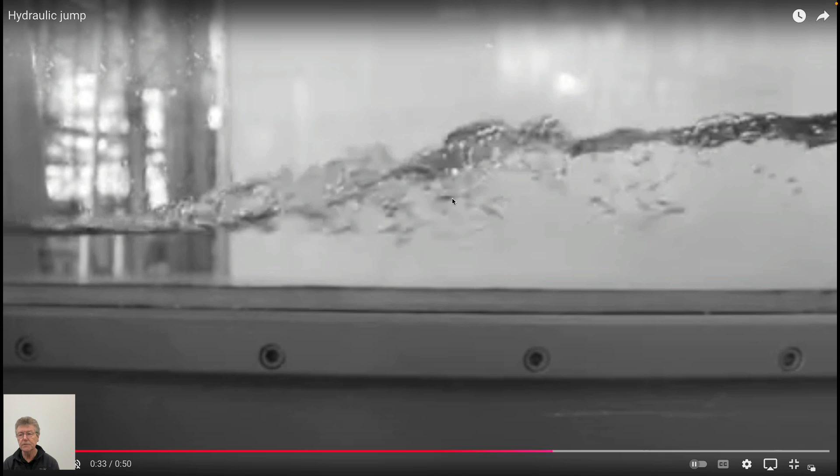And so the upstream flow has to be faster because it's going through a smaller area, and the downstream flow has to be slower. And actually, you've done something like this in one of your examples when we did conservation of mass, and one of you tried to do it using Bernoulli and found out that it didn't work. It doesn't work with Bernoulli because as you go from upstream to downstream, the energy is not conserved in the system, because it violates one of the things in Bernoulli, and that is that you have all these vortices which are really eating up the energy in the system, just like pipe flow and viscous drag on pipes on the inside and on objects on the outside for external flows.

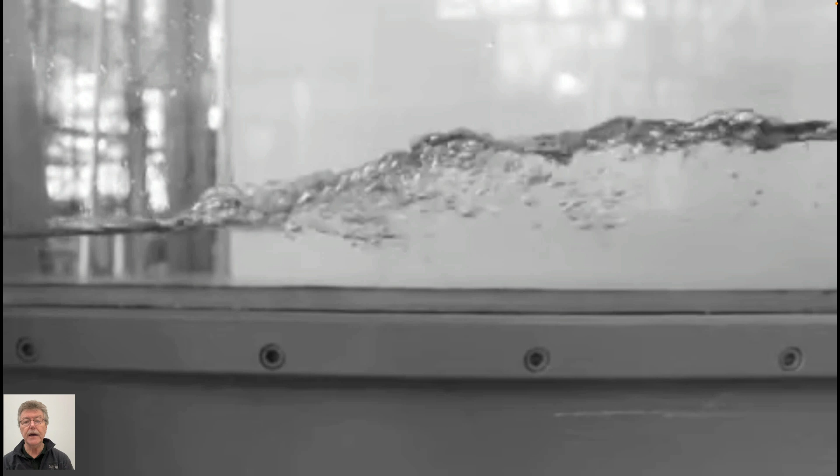The essence of those problems is understanding the losses within this system. And so when we deal with so-called rapidly varying flows, rapidly varying in depth from upstream to downstream, or it could be the other way, going from a deep upstream to a shallow downstream with the same ramifications for the velocity changes, then we have to account for energy losses in the system. So that's kind of the essence of what we might want to talk about here.

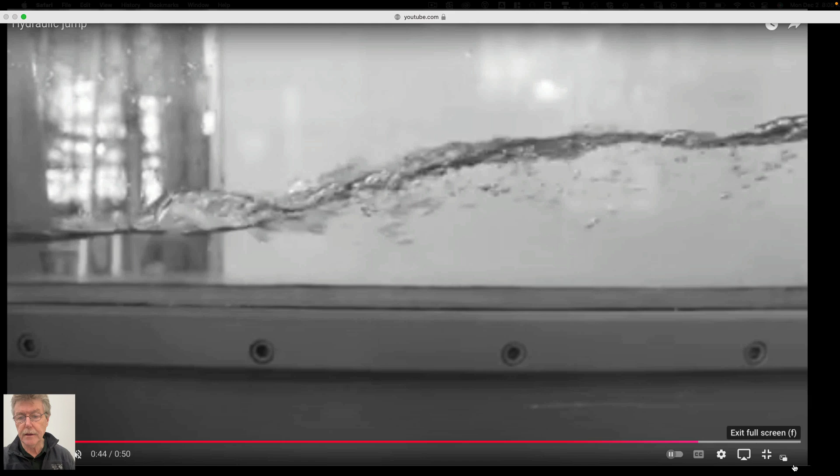I didn't want to do that. I will put that on hold so it doesn't do anything strange for us. So, the essence of these flows are exactly that. Don't know what that is. Don't need to comment.

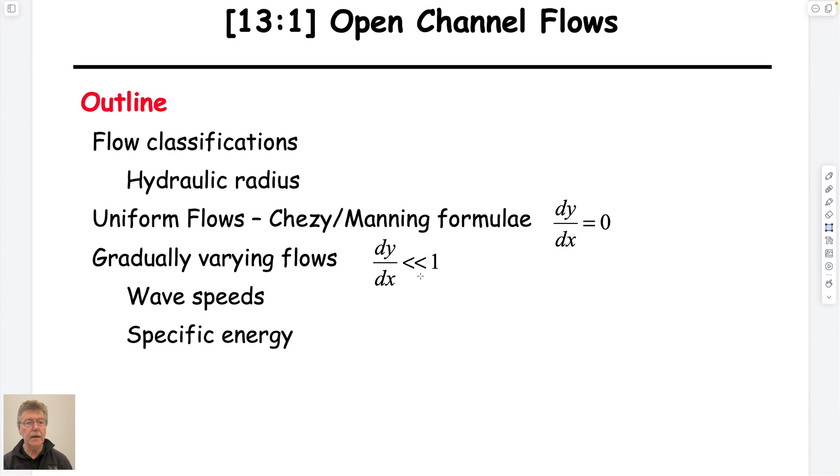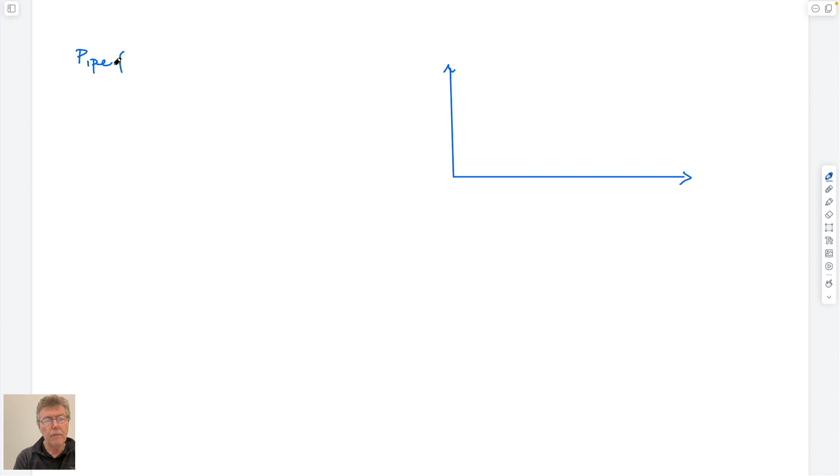So we'll talk about open channel flows. Maybe, although it doesn't have it written on here, it's useful to give a recap before we talk about those, because we've talked about a bunch of individual things. I've showed you these plots before, but let's do it again. Let's talk about the commonalities between pipe flow, external flows, and open channel flows. And so the commonalities are, if I do this, I'm going to draw three diagrams like this.

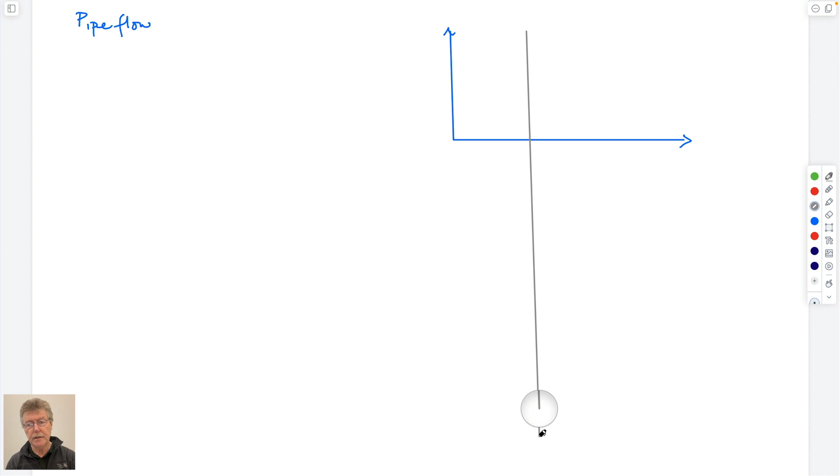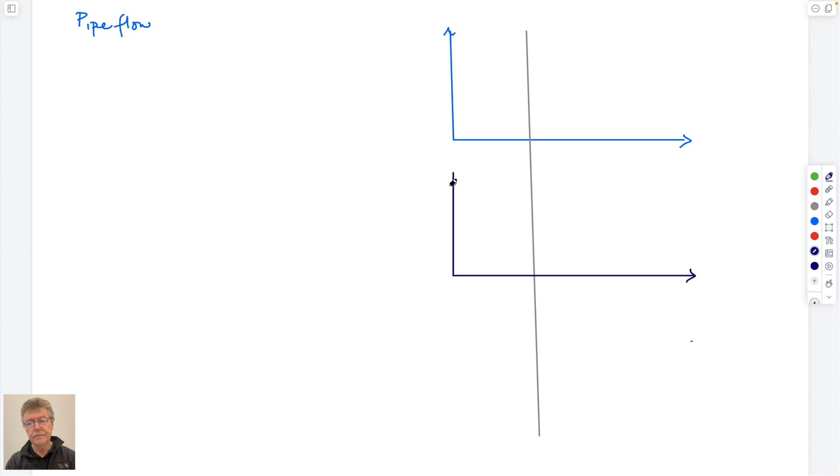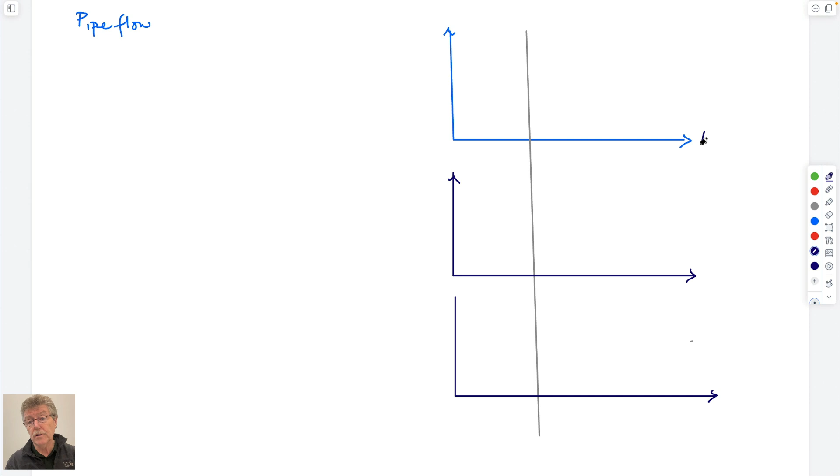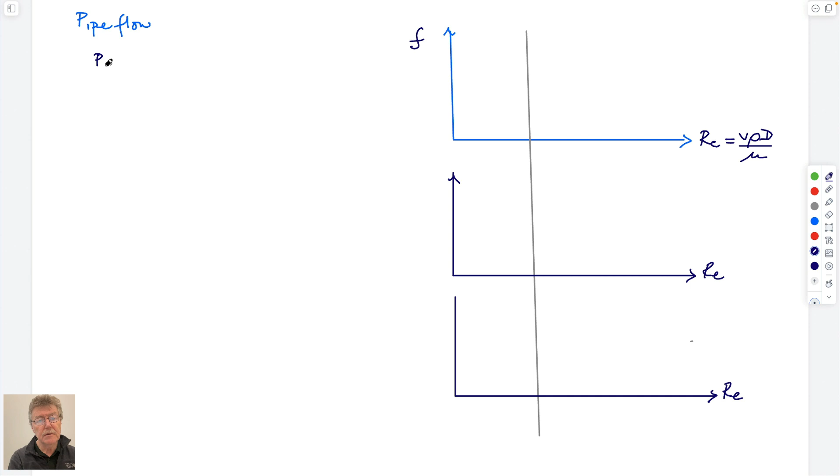And you've seen the segmented plot that I had before in three columns, but for pipe flow. So in all cases, this is Reynolds number, which is equal to a velocity times a density times a characteristic dimension divided by a viscosity. Same in all cases. For pipe flow, we have essentially P1 minus P2. We can do it by writing Bernoulli, or the energy equation, in terms of upstream and downstream. We have this is equal to sum of HL plus sum of HL. So these are major and these are minor. And you know what these are.

Head loss is equal to a friction factor, times length of pipe, over hydraulic diameter of pipe, times V squared over 2g. And minor losses, I guess I shouldn't be doing them so low because I'm moving into this, minor losses are a loss coefficient times V squared over 2g. So they have the same parameters here that they're working on. We end up with this typically because upstream and downstream of a pipe, the diameters are the same, and so the cross-sectional areas are the same, and so V1 equals V2, and so it cancels out in Bernoulli.

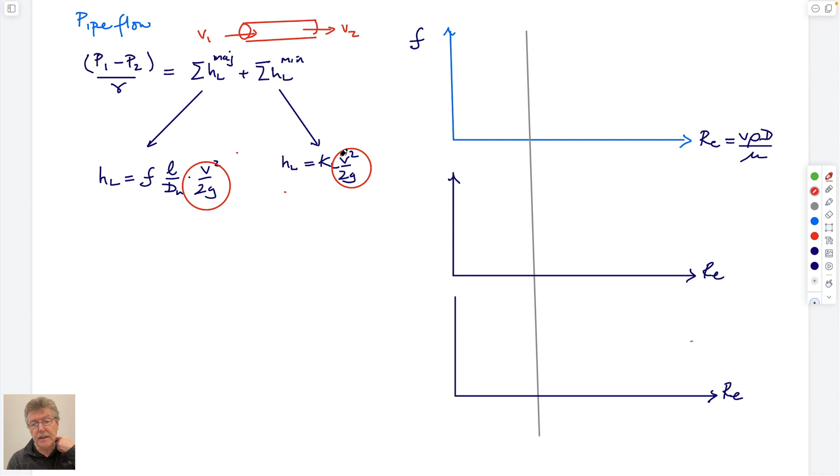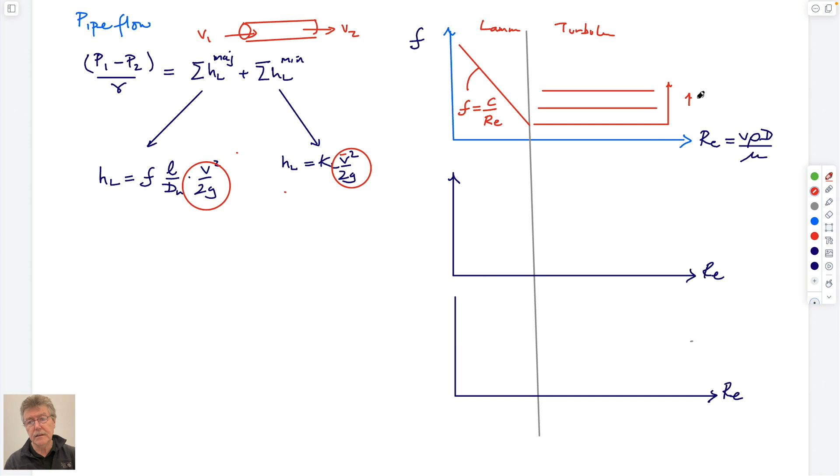But this is the velocity that's actually in the fitting or in the pipe, and we know that these Moody charts look like this. And we understand, hopefully, the characteristics of those charts, and that is that in this part, in all cases, this is laminar, this is turbulent. Friction factor is a function of Reynolds number, or reciprocal Reynolds number, and this is increasing relative roughness. So these are larger numbers and these are small. You'll remember it's a log scale, log scales on both axes. And these are for different values here. And so importantly, friction factor is constant for all of these.

And therefore velocities and losses are due to density. A truck at San Francisco International gets pushed off because you're killing the momentum of the stream that hits against its side. So it's really the density that's causing the push on that. I guess that's really for this one here, but it's the same. We talked about open flows. We're interested in the force that's applied to the body. We don't care about the flow field. Pipe flows, we're interested in the force that's applied to the flow field that slows it down, but it's the same effect.

And this is also, as we know, kind of an Euler number, which is equal to a pressure change over rho V squared. So that's exactly what this friction factor is. And so in this zone here, friction factor is proportional to viscosity. Friction factor, or head loss, is I guess probably head loss, right? It's not really friction.

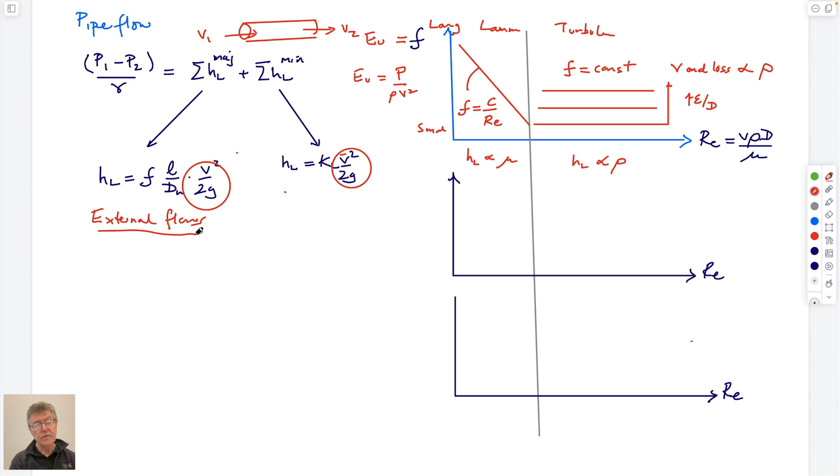When we looked at external flows, we look at drag and weight. Essentially, of course, that's a curly d, not a diameter. And we know that we can define a coefficient of drag or a coefficient of lift as CD equal to curly d divided by a half rho v squared, a I think as well, right? D over a, yeah, must be.

And we made the point that this d over a term is really a pressure, a force divided by a planform area, the area that this sphere sees, which would just be its pi d squared. I don't want to confuse things, but this is d in terms of diameter. And we have exactly the same behavior that we see here. I think probably we have something that looks like this. We get some interesting little behaviors in terms of anomalous responses here. But this also is, what is it? It's also C over Reynolds number. And this is different curves for different shapes. And so the same thing.

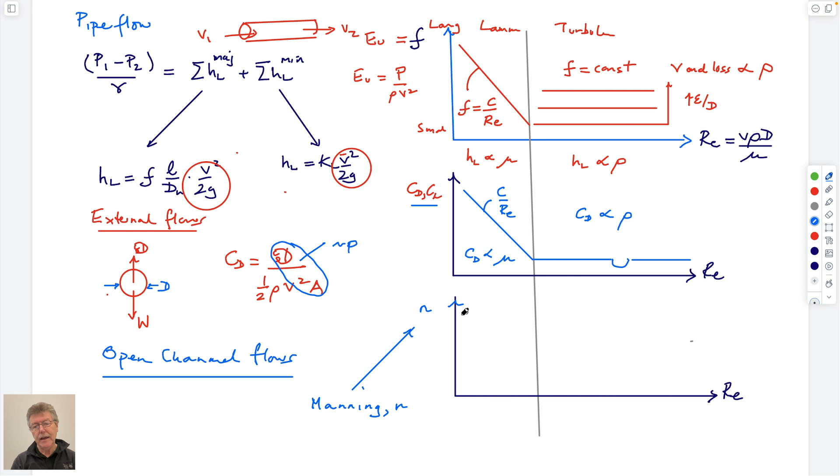And this is kind of increasing relative roughnesses. We won't call it relative roughness, but it's going from a glass lined channel to a concrete lined channel to a soil lined channel. So increasing roughness of the side. And what we'll find out is that for open channel flows, open channel flows are defined in terms of a depth of flow, which we'll call y, and a velocity. And I didn't write the equation down, but we'll see it soon enough, the so-called Manning equation.

So what we'll find out also is that for even modest widths of channels, we're almost always in the turbulent regime. I didn't mention it before, but we assume always for fittings that KL is typically a constant, which de facto means that we're over in this side of the curve, and we're assuming that flow within those fittings is turbulent. If we look at open channel flows, we'll find out that the laminar regime doesn't exist. Almost all flows are turbulent, and so the values of this coefficient change from small numbers, Manning is small, to big numbers as you change the different makeup of the surface.

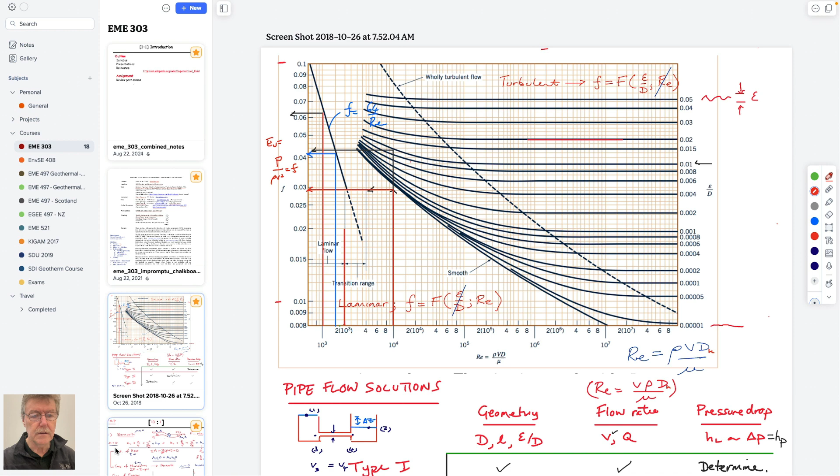So that's what we'll spend a bit of our time doing. And so I'll bring that back up, but the other thing that you've seen that relates to this, I did find it. So you've seen this figure before. It might not have meant anything to you or much to you the first time you saw it, but it should mean something to you now, in that we have these three different geometries.

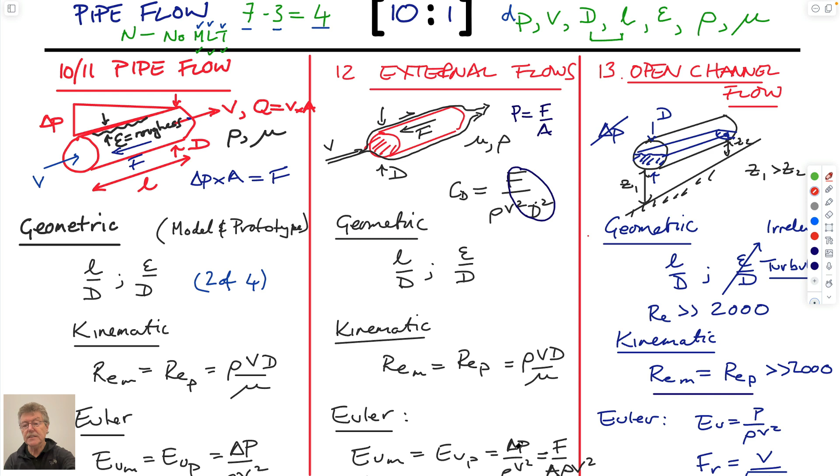If we're doing dimensional analysis, then we have these three requirements of geometric similitude, kinematic similitude, and dynamic similitude. Geometric similitude means that the models have to look the same in some way between prototype and model. Kinematic similitude means that we have to be running at the same Reynolds number between the two models, because that makes our flow regime look the same. And if the Reynolds numbers are the same in the model and the prototype flows, then if the Euler numbers are the same, we can calculate what the pressure is that's making it flow, or the pressure that is applied on our airfoil, or the pressure drop that is applied in our pipe between upstream and downstream. We can get that from the remaining requirement of dynamic similitude.

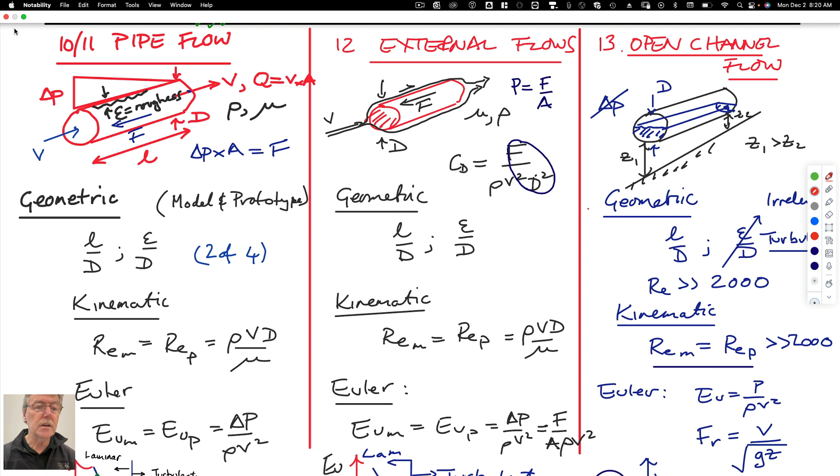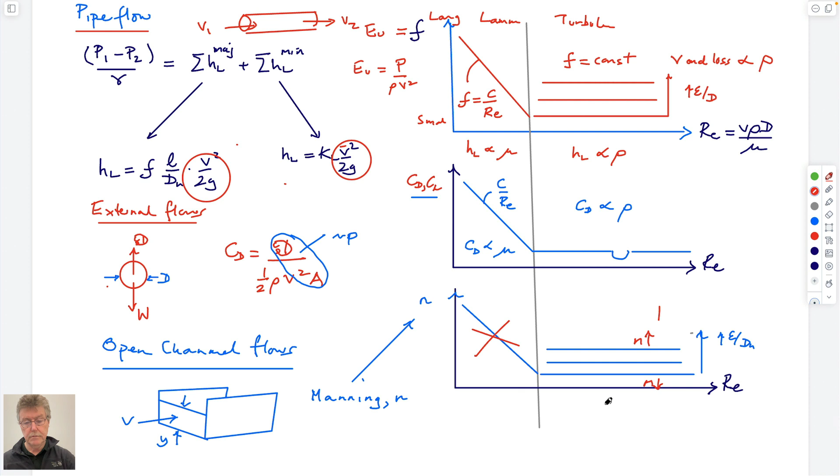So we don't have to derive any equations. We could do a bunch of model studies and get that out of it, but it follows the same path. The same goes for what we're talking about now. These charts, the Moody charts we look at, are just saying that you need to be at the right Reynolds number. And so we make sure that we're sitting at the right Reynolds number through all of these. And if we're at the right Reynolds number, we know what the friction factor is, or we know what the drag coefficient is, or we know what the Manning's number is. And so that's all we're doing to be able to do this.

So what we'd like to do for these, again, too much whiskey, actually Drambuie last night. What we're having,

we'd like to be able to calculate what the velocities and the flow rates are within our system. And so we need to be mindful of two things. One, that we can have flows organized in two ways: fast, shallow flows, or deep, slow flows. And also it allows us to reorganize in terms of the depth of flow. I guess that is the main one. Okay? So that's the recap.

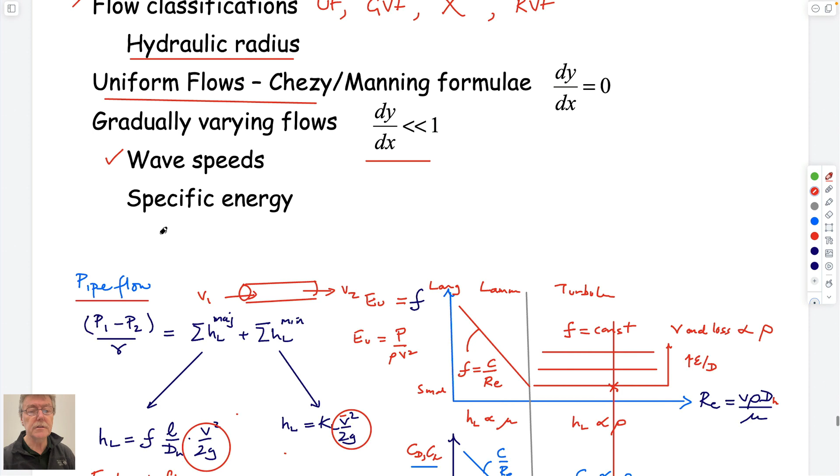And wave speeds have something to say about open channel flows, because of the wave speed of a wave in water, if you have a river flowing downstream, and if you look at the wave speed emanating from dropping a pebble in, that's carrying information away from that impact to the further reaches of the flow. If the flow downstream is flowing faster than the wave speed can travel upstream, there's no way that information can be transferred upstream. And so it defines some different forms of flows.

So I'm going to use my old notes, the former notes for this. So I think the main two issues in pipe flow: one is that you have a free surface.

So that's an extra wild card in terms of the fact that it could be a shallow fast flow or a deep slow flow. But the other thing, I suppose, is that there is no pressure difference between upstream and downstream. If you try, this might be flow within a pipe, but if you have a pressure difference between upstream and downstream, it will just short circuit it by going through the air, and therefore it won't be able to hold much of a pressure difference between upstream because it will be transmitted in the air above the water.

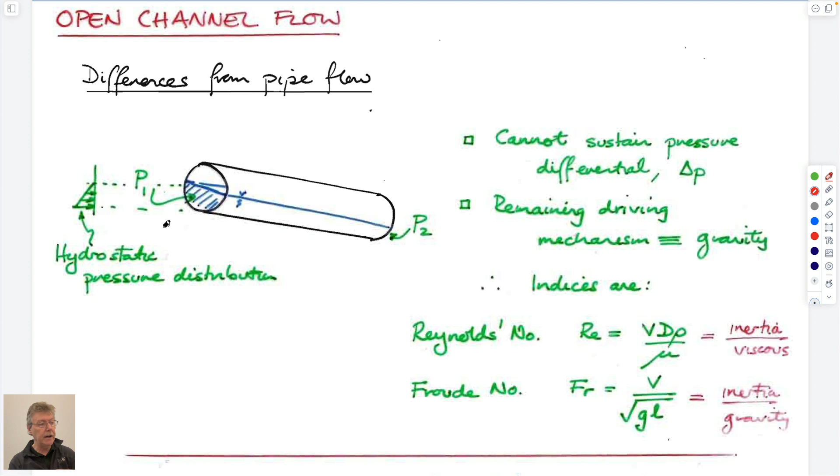And so the pressure difference is only given by the depth change, the change in pressure with depth. And so it's really the only driving force is gravity that's pushing it downstream. Just like rolling a ball down an inclined slope, the only thing that's making it move is gravity.

We can define behavior in terms of two numbers. One you know very well, which is Reynolds number, which we'll talk about. We've alluded to the fact that that's important because of the Moody-like Manning charts, but also Froude number, never quite sure how to pronounce it. And the Froude number is the ratio of inertia to gravitational forces.

And you'll remember that this number on the bottom, gravitational acceleration times the length, if you take the length as the depth of flow, this was actually the wave speed of a surface wave traveling, a tsunami, for example, is given by this. So this is actually the ratio of the velocity of the flow within your pipe or open channel to the wave speed. And it signals as to whether information can be passed upstream, which we'll talk about, which I think is kind of a cool idea. So we've made the point already that we think we're always turbulent.

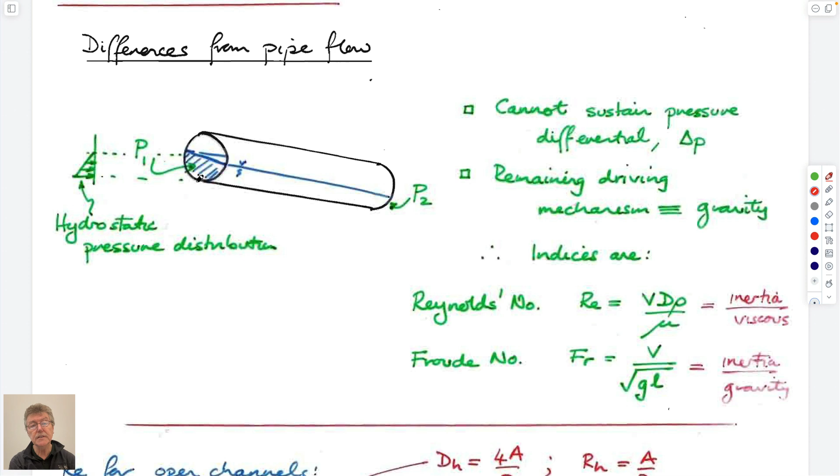In open channel flows, we define something called the hydraulic radius, which by definition is just the cross-sectional area of flow divided by the wetted perimeter. Just as a hydraulic diameter was the cross-sectional area of flow divided by the wetted perimeter. The wetted perimeter was the circumference of the pipe that it's flowing by. But of course, in open channel flows, the wetted perimeter would only be the wetted part of that flow, but the area would be the full area. By definition, this is the definition of hydraulic radius.

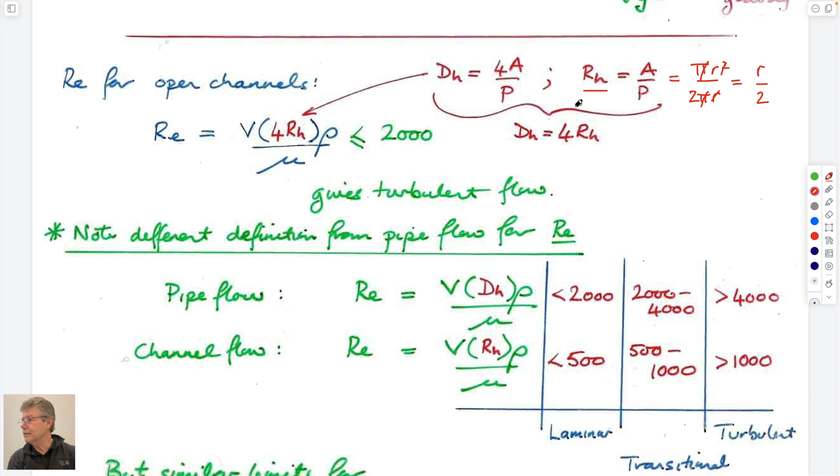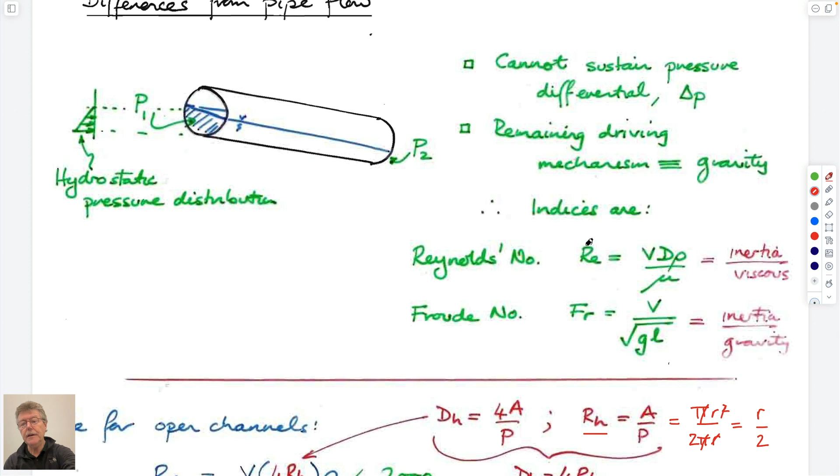I still don't understand why, if you put the terms in for this, the area, if it was fully wetted and circular, this would be pi r squared, and this would be 2 pi r. So this is actually equal to r over 2. You don't get the actual radius out of it if you put these terms in for circular section, right? This pi r squared and 2 pi r would be if this section was absolutely filled. So I imagine you could fill this section, imagine a little air gap at the top. That would still be an open channel flow because it's being driven by gravity. But the hydraulic radius doesn't work out to be the radius of the pipe when you put those in.

The hydraulic radius is actually equal to the hydraulic diameter over 4, just by rearranging this term here. And so if we put in the hydraulic diameter into our Reynolds number equation, which is all I'm doing here, then you end up with 4 times RH. And so different from pipe flows and external flows, the characteristic dimension that we choose is the radius rather than the diameter, hydraulic radius. And so for that reason, since they're a factor of 4 different, then our usual transition from laminar to turbulent happening at about a Reynolds number of 2000, happens at 500.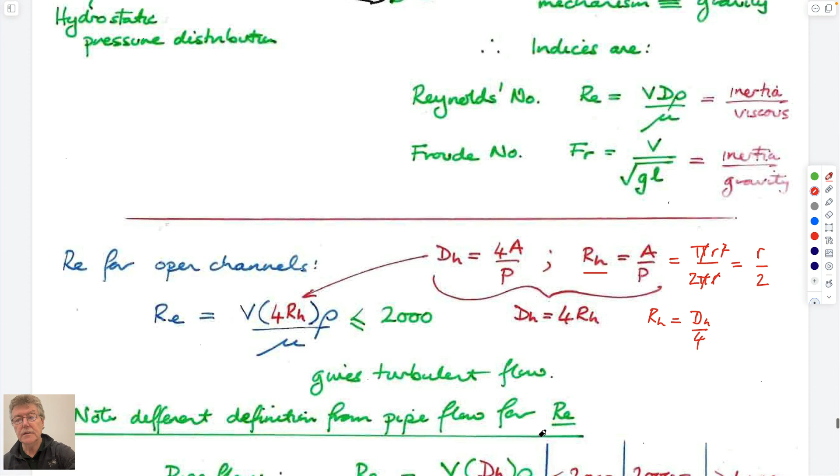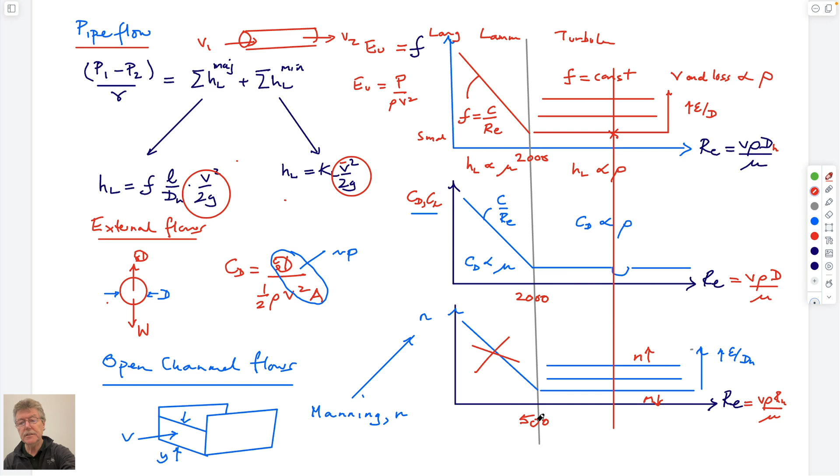And so I guess, I see you writing things down. I'll come back to that, but I'll just put on these figures. So this is, as you recall, 2000. This, as you recall, is 2000. This is 500. And this is velocity times density times hydraulic radius over viscosity. This is velocity, density, diameter, or some characteristic dimension divided by viscosity. So that's an important difference in these. So this breaks at 500. And the reason it breaks at 500 is just by definition that we choose to use a Reynolds number which includes a different length scale. And it's the so-called hydraulic radius. Okay.

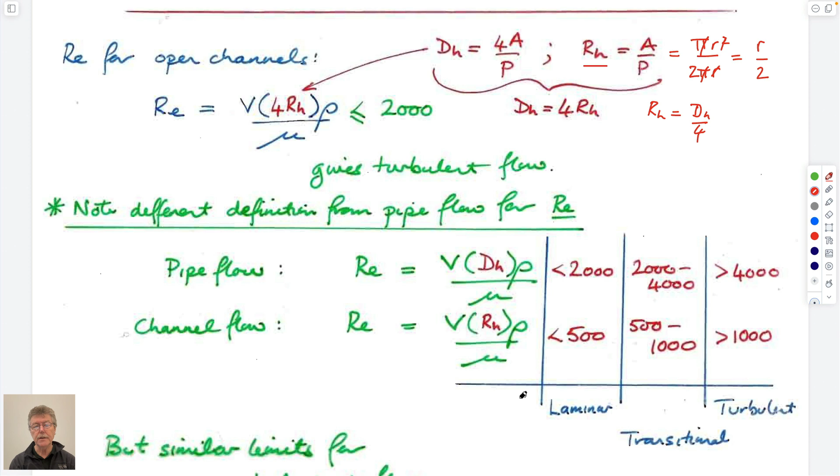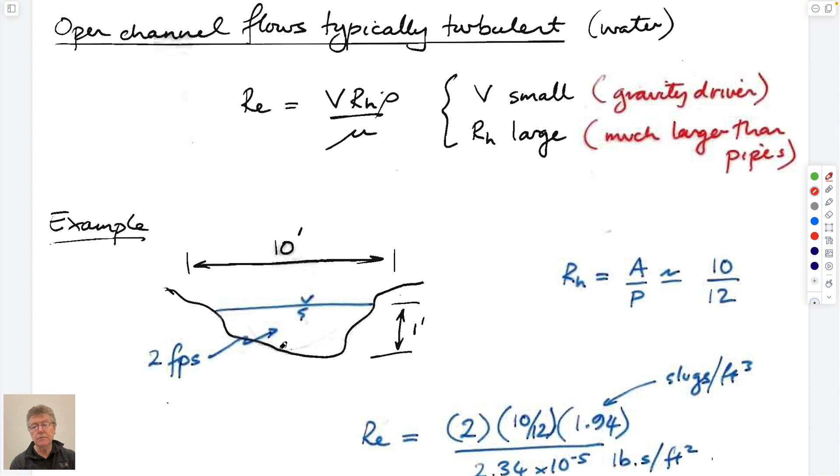I let you take it on trust, but haven't really shown it to you that we're always in the turbulent regime. We could work out what that is just by assuming some parameters for this. If we work out a Reynolds number for a stream 10 feet wide, a foot deep, flowing at 2 feet a second. I know I said we'd never use English units or imperial units, but the Reynolds number, 2 feet a second. The hydraulic radius is the area. The area is 10 square feet, 10 by 1. And the wetted perimeter is 1, 10, 1.

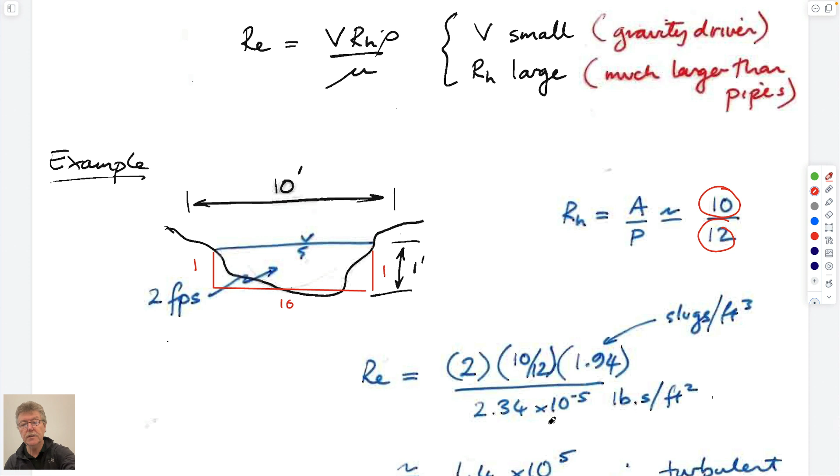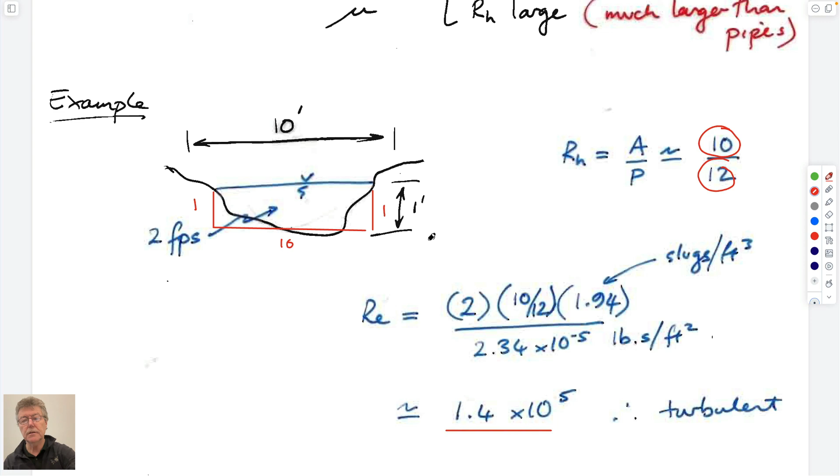So this is 12. And this is density of water. This is viscosity of water in English units. And if you go through that, you end up with a big number, much bigger than 500. So by definition, we're definitely on the right-hand side of our Manning chart, and therefore that's why we will define flows purely in terms of a friction factor, which we call N, which is a Manning coefficient.

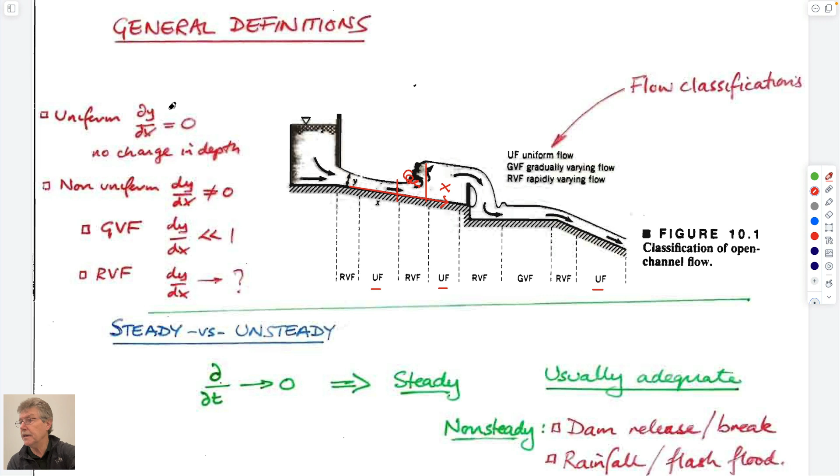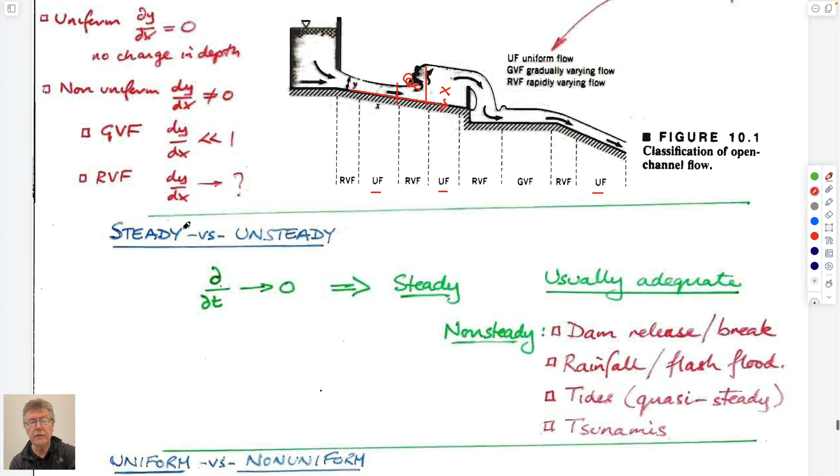Today we'll look at uniform flows, which are the case where upstream depth, so the coordinate system for this is depth is vertical, along flow depth length is x, which is this. And so when upstream depth doesn't change as you go along, you have a so-called uniform flow. Mathematically, it's just given as dy/dx equals 0. And so for gradually varying flows, this gets progressively larger, still not very big, as you'll see here, much less than 1. And here, much bigger values for rapidly varying flows. We'll look at steady state flows only in our system.

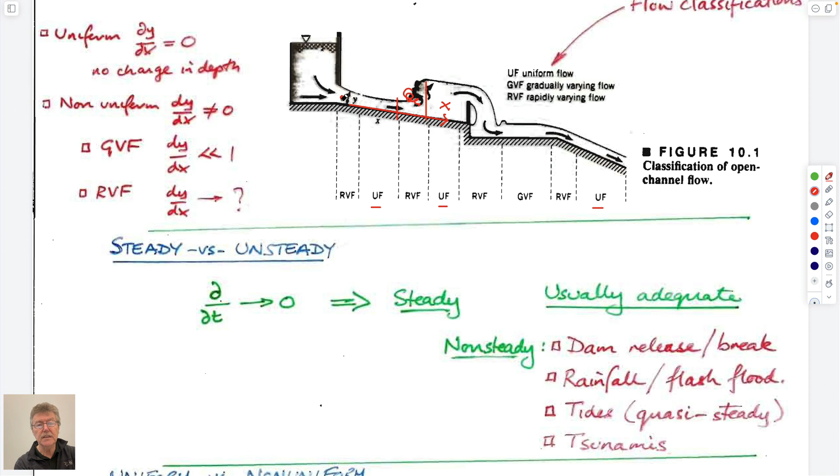So in other words, rate of change, if you take a snapshot, it doesn't change. So that means that if you take a side-on snapshot of this, if you look at this now, or if you look at it in 10 minutes, it's still all of the way along this flow, it looks the same, although obviously the particle of water, or the molecule of water that existed here, is no longer here at the later stage. So we know exactly what steady versus unsteady means. And the difference between these uniform and non-uniform flows are kind of epitomized here. Non-uniform flows is basically the depth of flow upstream and downstream changes.

And we can also define the slopes of other variables in the system as we go downstream. So you'll see here that this is the bed slope, and we can define the bed slope as equal to delta z over x. This is just the slope of the bed, which is obviously, put a ball bearing on a flat slope, it doesn't move. Put it on an inclined slope, the further inclined, the faster it will go. And so you can imagine that flows are the same.

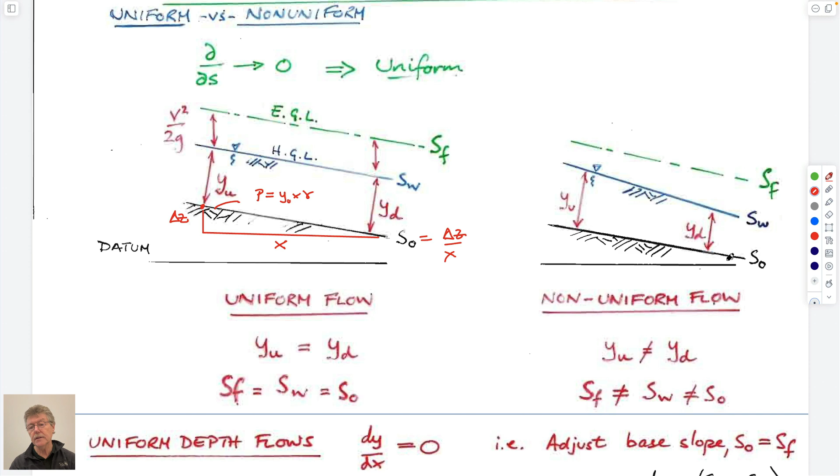Hydraulic grade line would be, this would be the elevation head. This would be the pressure head, kind of, right? So if you wanted to get the pressure at this point here, it would be equal to Y times unit weight. So this is really the pressure head. So elevation head, pressure head, and velocity head. This is measured perpendicular to the bed, but it's so shallow that it's irrelevant as to which it is. And I guess for uniform flows, the point is that the hydraulic grade line and the energy grade line are all the same gradient, and the upstream and downstream flows. And of course, they have to be that because if this depth here is the same as this depth, then the velocities here have to be the same. And so v squared over 2g upstream and downstream also have to be the same as well. Not so when we deal with non-uniform flows, that these individual slopes, the energy grade line, hydraulic grade line, and the bed slope can all be different from each other. But this is the one that we're going to deal with today.

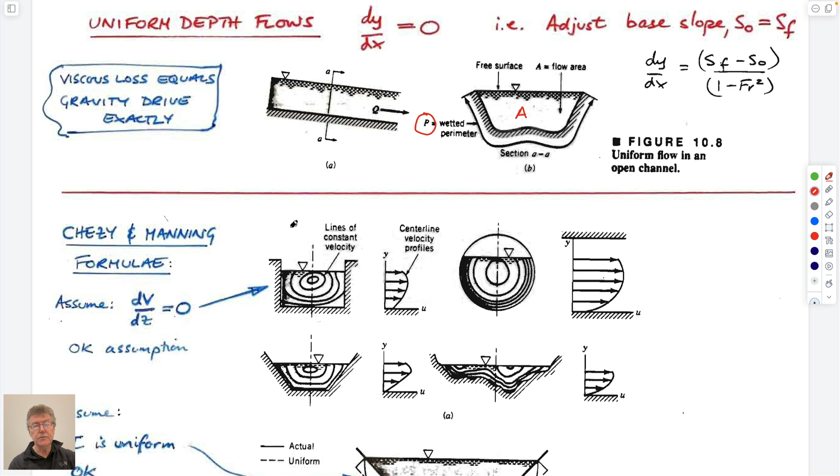So what else do we need to think about? Let's not worry about this figure on this equation on the right. We were interested in the fact that we have flow within it. We know that we have a free surface of flow area, wetted perimeter. So this is the area, and the wetted perimeter is this for a bed. Side-on view, upstream and downstream. I guess the reality is that in these systems, if you want to go fast in a river, go down the middle of the river. Don't go at the bank where it's dragging against the side. Just like in pipe flow, if the section was fully filled, we had zero velocity at the boundary of the pipe, and we have a maximum velocity in the center of the pipe. In open channel flows, you'd expect to have the zero velocity at the perimeter all the way around, and the maximum velocity where it's unconstrained in the middle.

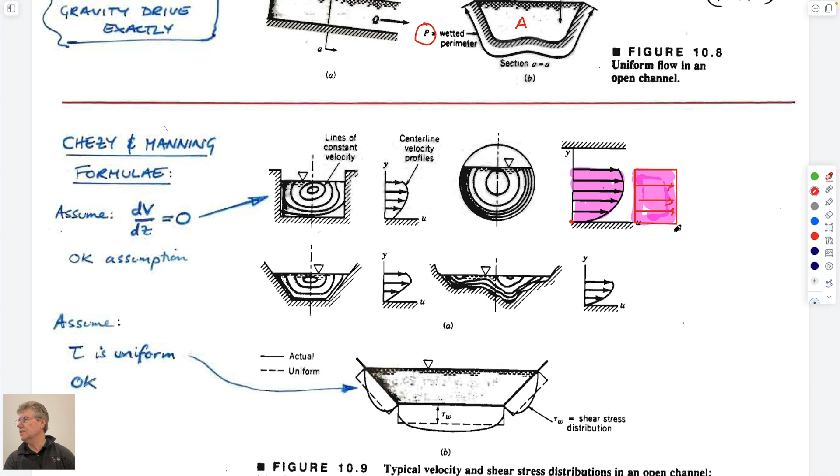Like in pipe flow, we assume for these calculations that the flow is of uniform velocity across the section. And so the area of this red trapezoid or prism, let me use my special marker. This area here would be exactly the same area as here, just like we did for pipe flow. And so that's our assumption.

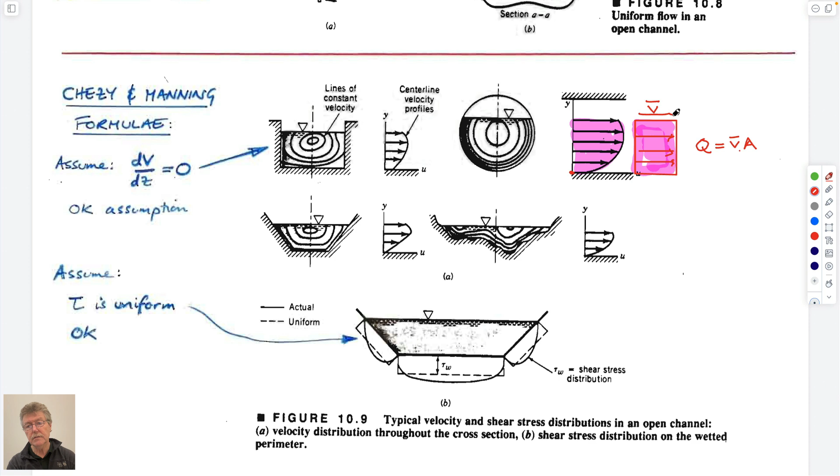So we don't really care that there are changing velocities in the flow field, because really what we want to calculate is that a volumetric flow rate is equal to a velocity times a cross-sectional area, typically, right? And so to do that, we need an average velocity, and this, of course, would be the average velocity across the section here. And we know that there are shear forces added at the sides, and they're probably not uniform, but we perhaps don't worry about that too much either.

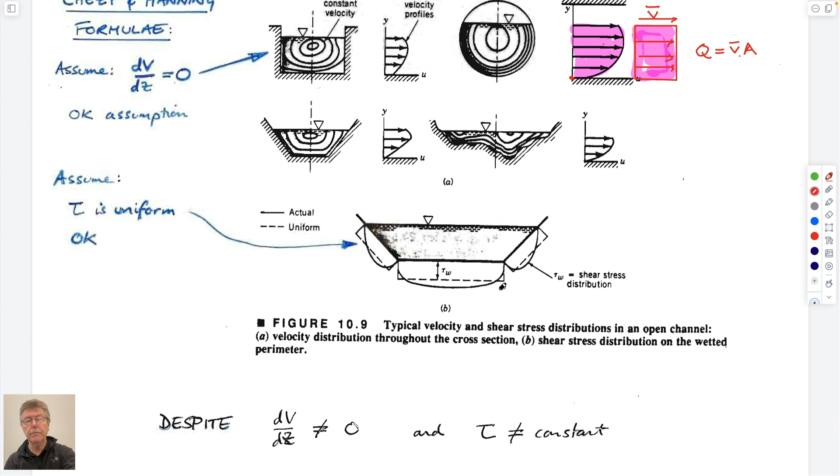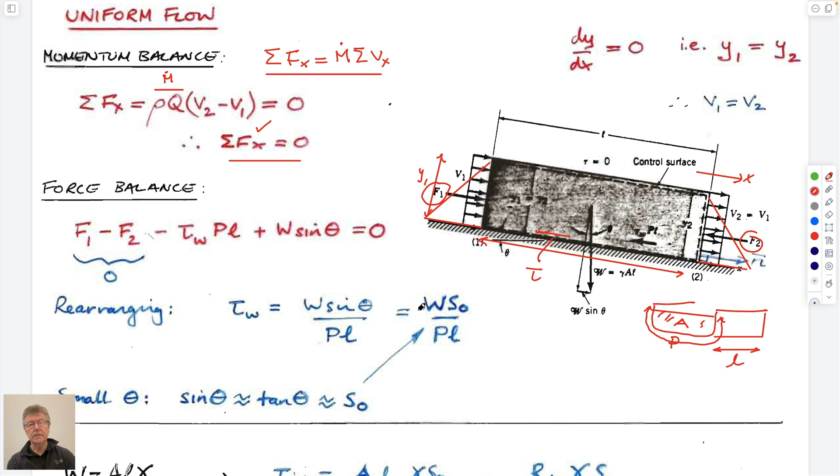So the only thing that matters out of this is the final equation that we get out of it, by the way. So this is the shear stress times the perimeter times a length. So this is an area that the shear stress is applied on. Sorry, probably don't want to do an uppercase A. The area would be the area of this channel, right? If I did it this way, it would be this area here and on this side here and on the bottom as well.

And the only force that's pushing it down is the component of the weight. So the weight is equal to unit weight times the cross-sectional area times the length. So the cross-sectional area times the length is the volume times the unit weight, if you can see this here. So this is equal to area times the length times the unit weight.

And the component of it acting downstream, if the bed is angled at theta, then this angle in here is theta, and so the component that's acting downstream in the same direction as the forces acting upstream and downstream is W sine theta. So this is just a free body diagram. Cut the stream upstream and downstream, leave it there, look at all the forces that are acting.

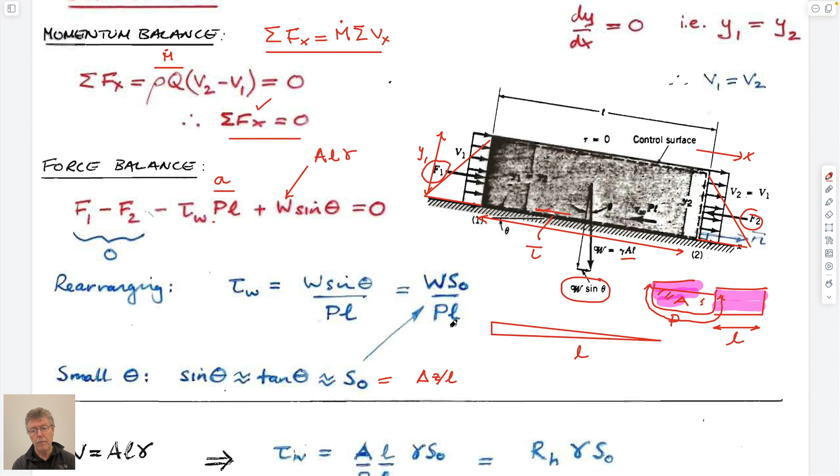We can substitute the fact that sine theta and tan of theta for small angles is equal to delta, what do we call it? I called it delta z before, over L. The height drop, so as you go downstream, this would be delta z. We must be running out of time, I think. Yeah, not quite. And so we can make these substitutions.

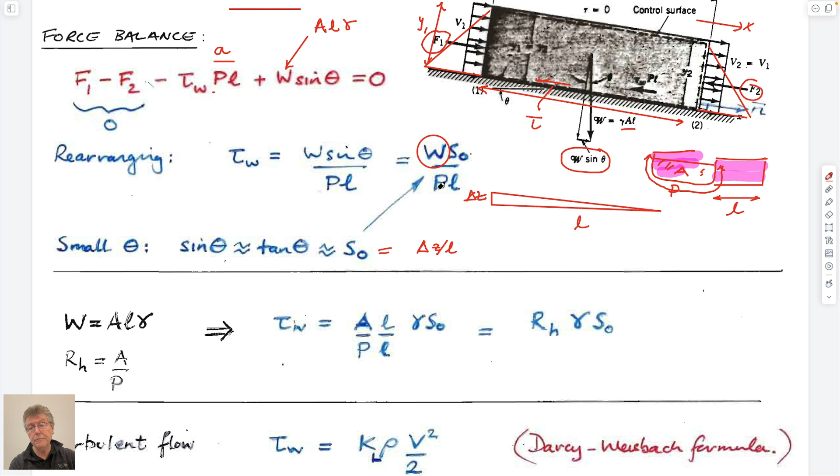We have a value for W, which we know. We have the gradient of the bed, we have a wetted perimeter, and we have a length over which it occurs. And so we can rearrange this in terms of the definition of hydraulic radius, which is merely by rewriting this as, this term here is this. This is this. Yeah, so it's the same equation.

And so by realizing that the area divided by the perimeter is by definition the hydraulic radius, we can substitute this. So this is the end result of this. Driving the flow, unit weight, and the hydraulic radius. So this is a balance between the shear resistance resisting the flow and gravity that's driving it through this unit weight and this slope.

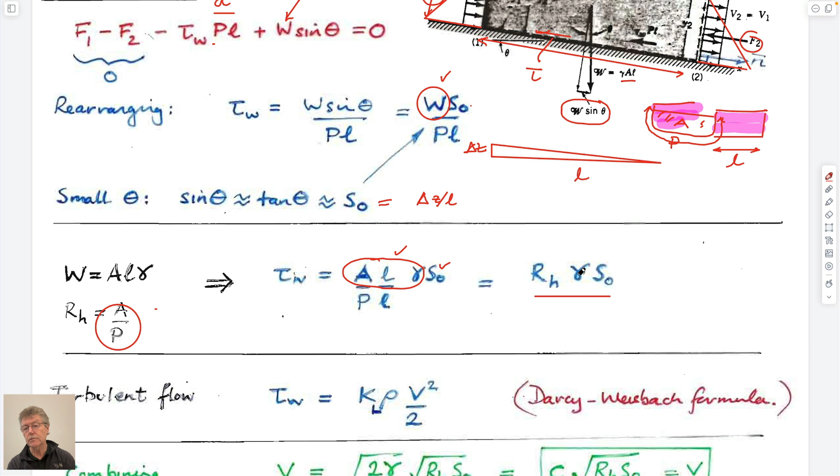I'm not sure we talked very much about the Darcy-Weisbach equation, but you can see that this is basically the loss factor for fittings, right? KL times V squared over 2g is the head loss in a fitting. And so this is kind of what this is. If we equate these two to each other, this is just saying that there's some coefficient that defines exactly how big this shear force will be that's resisting flow within the fittings, or in this case within the open channel. Then if we can define KL, then we can say how much drag is applied to the flow for a given gradient of the bed.

And so if we equate these two equations and go through manipulating them, we have a V squared term in here. So if we rearrange the equations in terms of V squared, so we equate these two equations, actually it's this equation here. So we have hydraulic radius, unit weight, slope of the bed is equal to this term. If we rearrange it in terms of V squared, we get a bit of a complicated equation. If we realize that this term includes our loss coefficient, which is going to be a number, depending on whether we have a glass-lined tube or a soil-lined tube or a glass-lined or a soil-lined ditch, then we can take this outside.

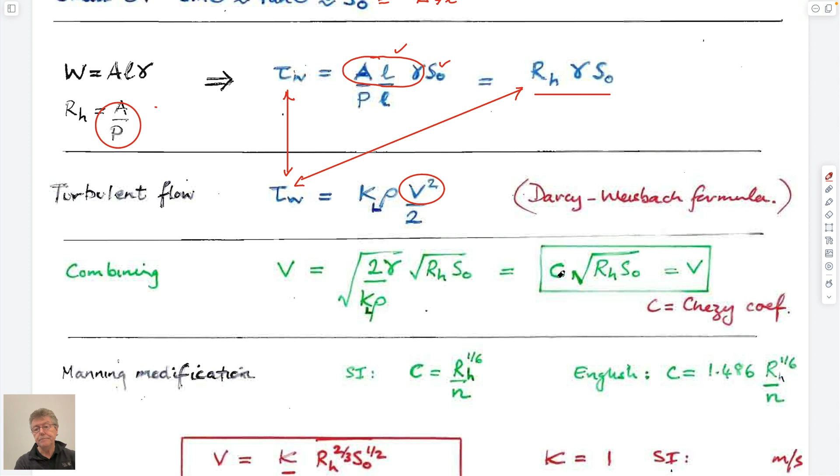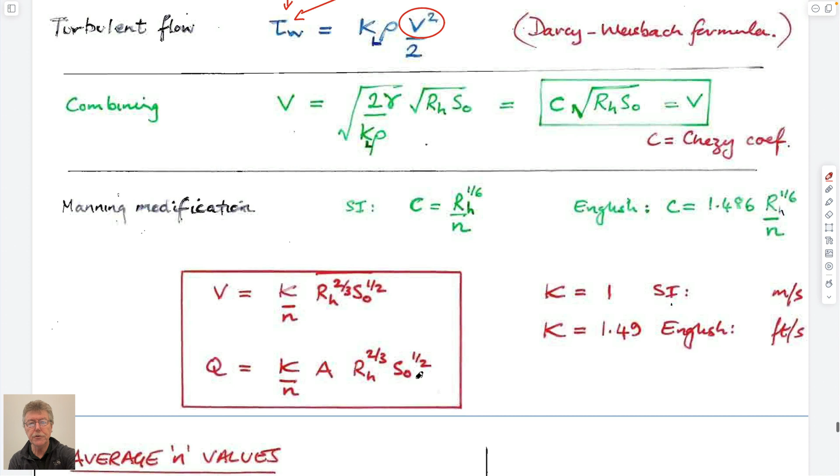And this might be the only equation in this class where it's dimensionally defined. In petroleum engineering, every single equation you use, you have to use the right units to get the right units. So for us, this has to be in metric. It gives us a velocity in meters per second as a function of hydraulic radius in meters and a bed slope in terms of length over length. I guess that's dimensionless. This coefficient kappa is 1 if it's in SI units, and we use the Manning coefficient, which is just a number.

If we want the volumetric flow rate, we just multiply, realize that Q is equal to a velocity, average velocity times the cross-sectional area, which is what this is here. And if we want to use English units, then we have to use kappa is 1.49, and the units are in feet and seconds. So hydraulic radius is in units of length, and so it would be in units of feet. And that's it.

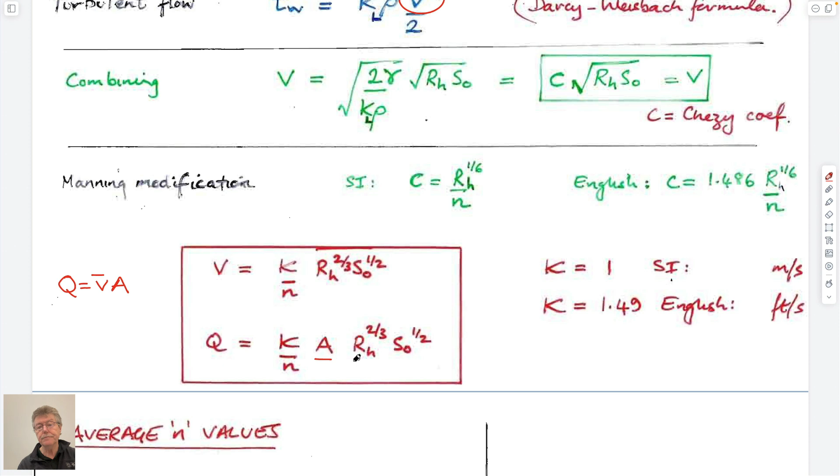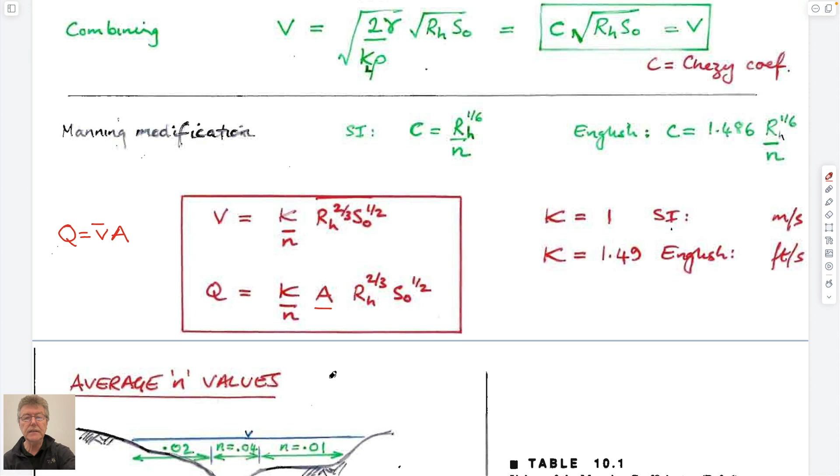And, well, we'll probably, yeah, fine. So maybe we'll start from there next time. We have plenty of time to do this. So that's it. So we'll talk about the end part of uniform flows next time, and then we'll move on to gradually varying flows, which is actually more interesting than this.